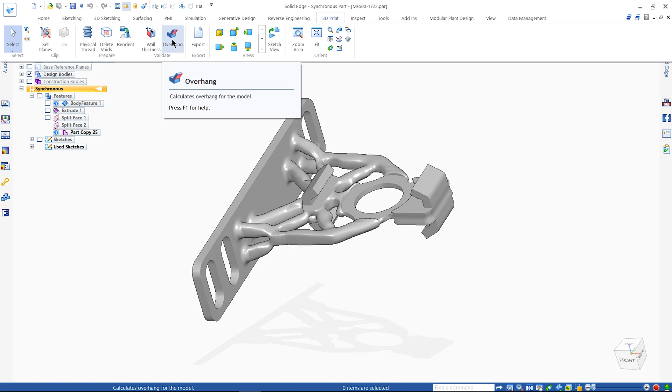Solid Edge's overhang check functionality allows users to visualize the amount of support material required to print a part, which is illustrated here in red. With a lot of support material needed, it would be better to print this part at a different orientation.

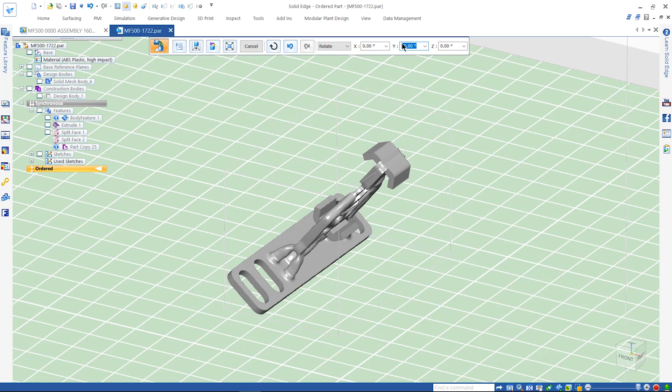With the reorientation tools, we can view the part in the context of the printer bed, where it can be moved, rotated, and even settled automatically. The new orientation reduces the support material required to print the part. A quick recheck using the overhang tool confirms this is a far better, more efficient orientation.

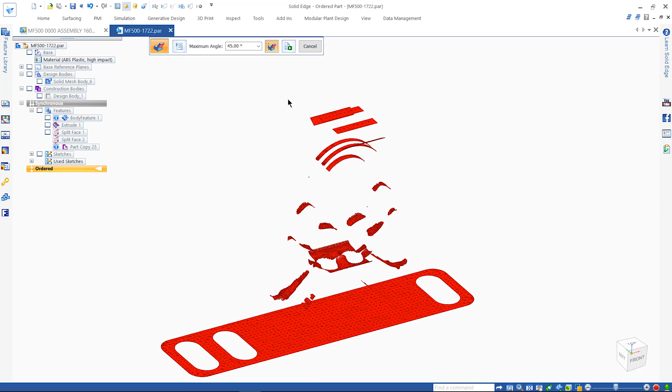Again, we can isolate the areas of overhang based on our maximum angle to get a clear picture of the support material needed. The wall thickness checker also allows users to visualize areas of the model that could present printing challenges based on printer specifications. Minimum wall thickness requirements can be defined to identify areas with potential issues. Isolating these issues gives a clearer picture as to whether the part will print successfully or need adjusting.

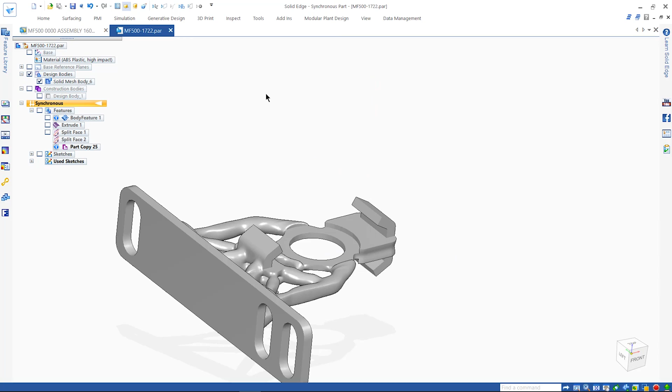Internal closed voids are another potential issue for 3D printing, particularly when using powder-based printing methods. Here we can see that placing a dynamic section through this part highlights a void inside the support. The Delete Voids command takes care of this automatically, removing the voids fast and easily.

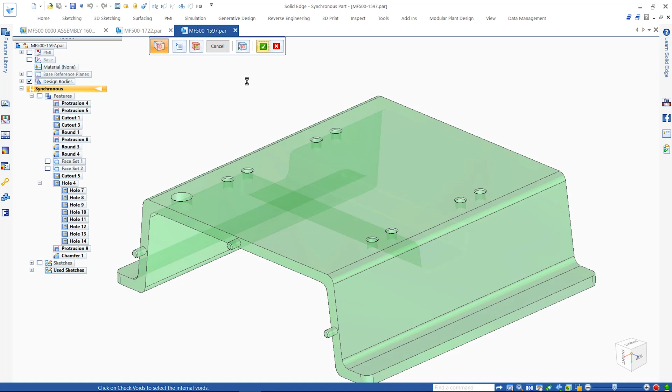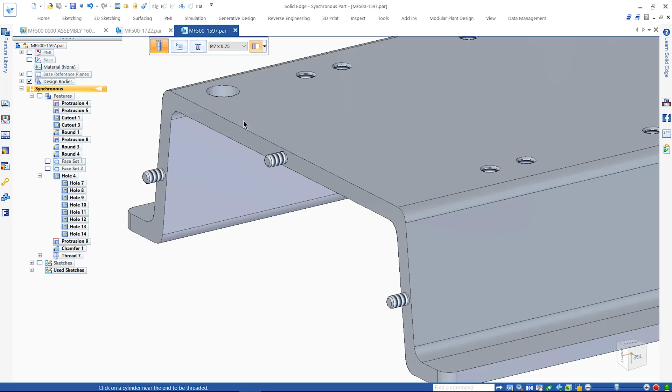A common requirement on parts that have threaded features is to have the physical representation of threads, so that the 3D print is 100% accurate and functions correctly. Initially, when the threads are applied, they are created as cosmetic threads for performance reasons. However, these can quickly and easily be switched to physical threads as they are created.

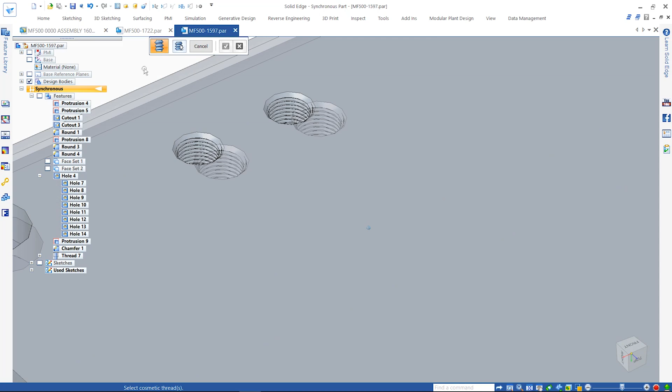For models that already contain many cosmetic threads, Solid Edge can switch these to physical threads during the 3D printing preparation process. Features can be selected individually or as a whole and quickly converted to the matching physical thread. Final output of the 3D print file is a quick and simple process. Regular 3MF and STL formats are supported, and users have full control over the resolution of the output.

From beginning to end, Solid Edge streamlines access to the additive manufacturing processes and tools needed to make your designs a reality, quickly and easily.